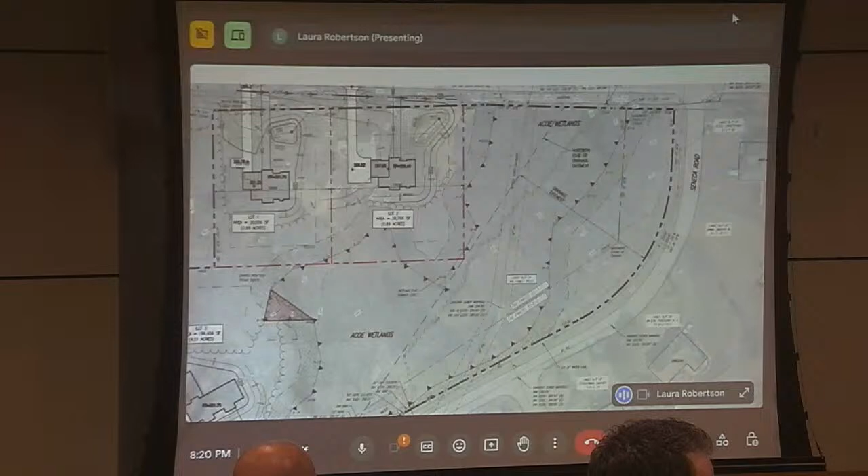I had a couple follow-up questions since we have Mr. DeSalt here. I had a couple questions just about your private stormwater practice, if you'll indulge. Sure. I was just looking at some of the detail, and I wanted to point out a couple things I noticed, and maybe I'm off, but it looks to me like there's a little bit of a difference, or maybe it's just a typo on the site plan.

Top of berm for the bioretention basin on lot 2 says 291.5, but the detail chart says 292.5. So I thought, since every foot counts on that lot, maybe check that. Okay.

I was curious to know if that under drain daylights to the southern end of the property, but I think that question was answered. Actually, I misspoke earlier—it does drain to the wetland, not to the roadside ditch on lot 2. But that does daylight to the wetland edge, and that's an under drain for the bioretention material below the surface of the ground. Right, and you're treating that, and it's designed to the 100-year, 10 and 100-year.

Correct, the under drain. So the system, the practice, is designed to pond 90% of the storms to 6 inches. And then anything above that 6-inch depth overflows and will flow into the wetland area. So it retains that 6 inches of depth for 90% of the storms, which is the water quality volume that will percolate through this filter media below the surface of the ground, and then that'll be discharged. That's the practice of cleaning impervious areas and contaminants.

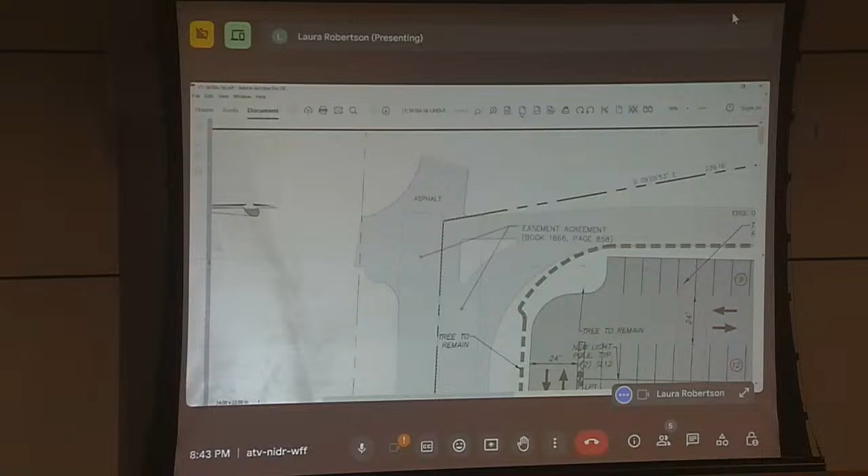So you're saying just build that corner out, I guess that would be the northeast corner of the site out, and which in result would end with alignment. Is that what I'm hearing? Yeah. And then I'm just zooming in.

Like what Luigi's saying, there's this existing concrete sidewalk that goes up along the side of Ace Hardware. And then the new plans show the crosswalk crossing here with a little bit of sidewalk coming down from the parking. I would still prefer a new sidewalk going down, but if it's a compromise, I think the back intersection could definitely use some work too.

Well, I agree with the applicant that having two sidewalks side by side that are very little used just seems like an additional impervious surface, which we constantly are trying to minimize. So if we could work on the intersection, I think that's a good compromise. And I'm personally okay with the crosswalk and utilizing what's there existing, but it's a vote.

Is there any reason why we can't use that sidewalk? No, I think it's open to the public. Yeah, we'll work out the easement there and see if we can adjust that intersection.

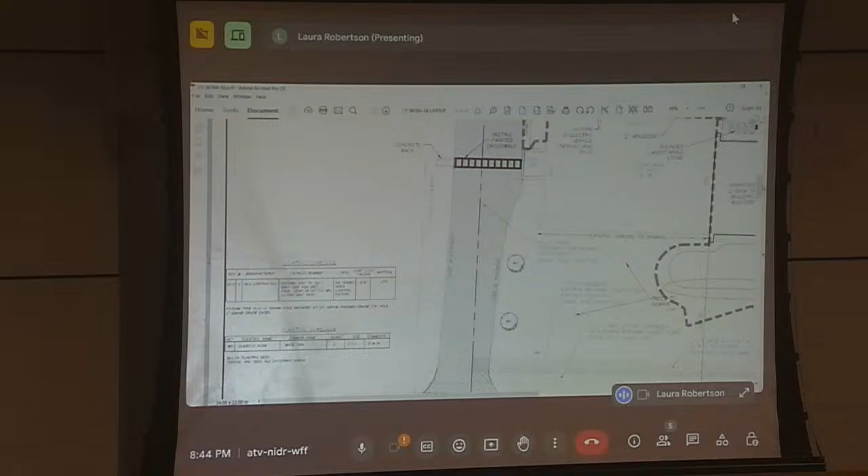So with your latest response, which they just received, that would go to the TDE to review, and then hopefully we'll hear back that the items are closed, and you have an action item to take a look at a couple of things you mentioned tonight, including this intersection.

So I thought we were pretty good with that. The biggest concern I heard at the last meeting was about the retention or detention in the front yard and what that's going to look like. It sounds like you increased it to plantings, so visually it looks hidden. Right, yeah, absolutely. And as you stated, it was a result of increasing the analysis to a 100-year storm—doing it underground and maintaining or expanding the underground storage you had would be quite costly.

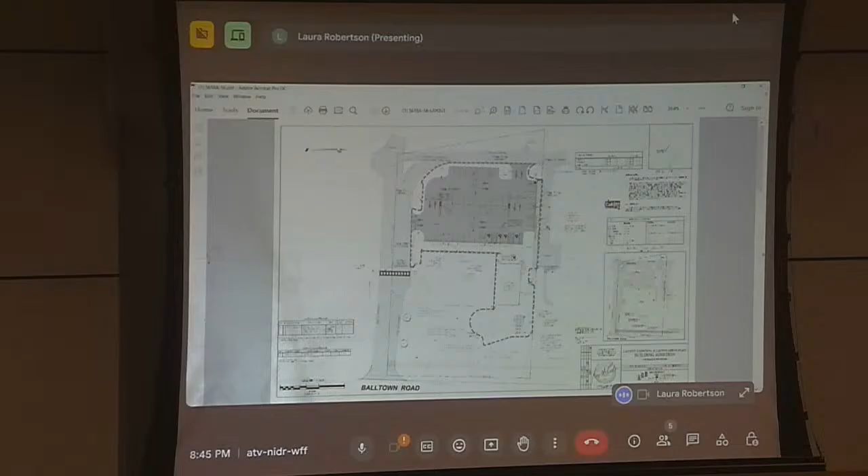Correct. And I do have one question on the loss of the two parking spaces. I know it meets code—is it going to meet the district's needs? Yes. Okay, because that's the big issue for me.

Absolutely. Well, I thought one of the other comments from the TDE was that he wanted to actually see the planting plan, not just a note that says landscape area with lilies, roses, fountain grasses, and landscaping boulders. Did you do a more formal planting plan? I have not, but I certainly can. Okay, I thought a note would suffice. Yeah, he wanted a formal planting plan to see the density and that stuff. That's easy enough, and that's what we typically do anyway.

Anything else you can think of, Ms. Gold, or Laura, or anybody? No, I think we're getting there—not quite there yet. All right, so is it too soon for tentative?

Because we just got this information today—we got two weeks, or do we? We would have to send this to the TDE, and he has to review a couple more things and come back to us. I think that would be rushing the TD—I think it would be tough. I don't mind preparing one, but I think the likelihood of it being ready is low.

And being that it's such minor technical items, and the time frame these guys have to get this completed for the school season—I don't know if there's a way to make it a condition, or at least get us to a point where I can have these resolved this week and get it to you by the end of the week. Again, they're minor, but if there's a way to set us up for approvals at the next meeting, that would be appreciated.

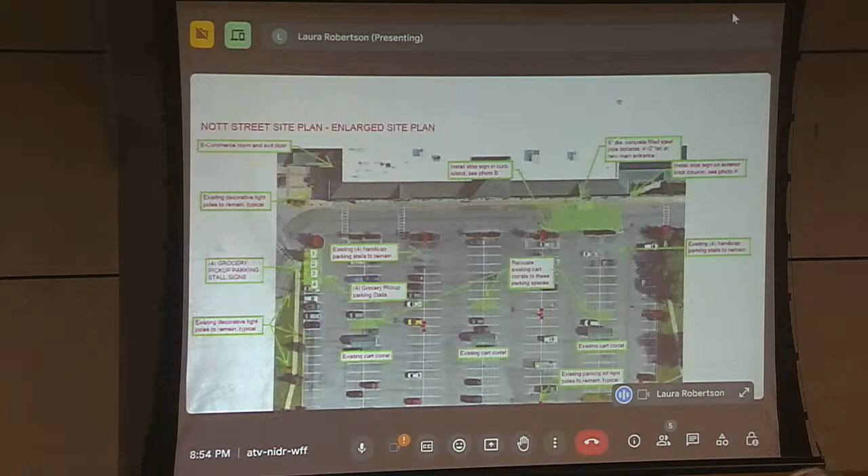On the site plan, there are currently 4 parking spaces on the left-hand side labeled 1, 2, 3, and 4. That's where ShopRite had their grocery pickup program stalls, and we're planning on using those same 4 locations. Our grocery pickup, or e-commerce room, is to the north of that, so our teammates can come out through the existing exterior door under the canopy and bring the groceries out to our customers in those 4 stalls.

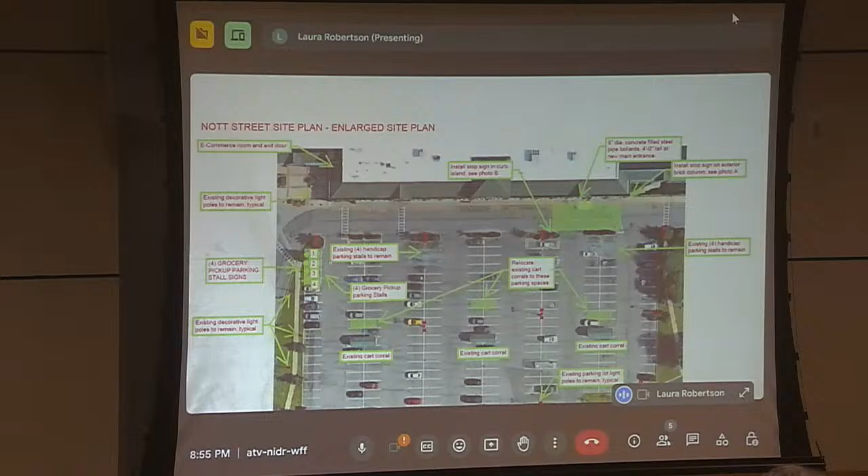There was a comment about site lighting. We do not plan on touching any of the existing site lights. In red, I've indicated where the tall parking lot poles with double head lights are located on the site, and we're going to leave those as is. Up by the grocery pickup there's one a little farther north, and there are some existing decorative light poles in that island that we'll leave in place. There's also one up in the walk area, and again we'll leave those as they are.

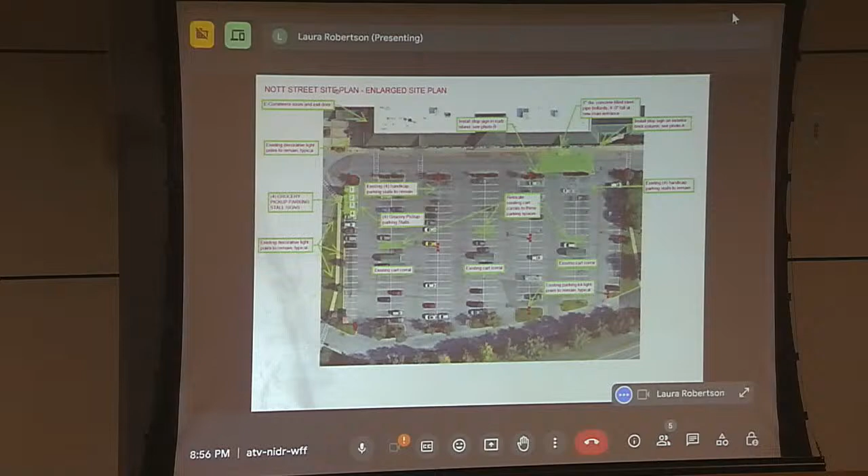Proposed crosswalks and striping. Clark provided us a drawing showing where he'd like us to paint the crosswalks, and we'll take care of that. We're in negotiation with our landlord, who will take care of it. In addition, the completed sidewalk apparently was never done as part of the original site plan approval, so we're in negotiations with our landlord to take care of that too.

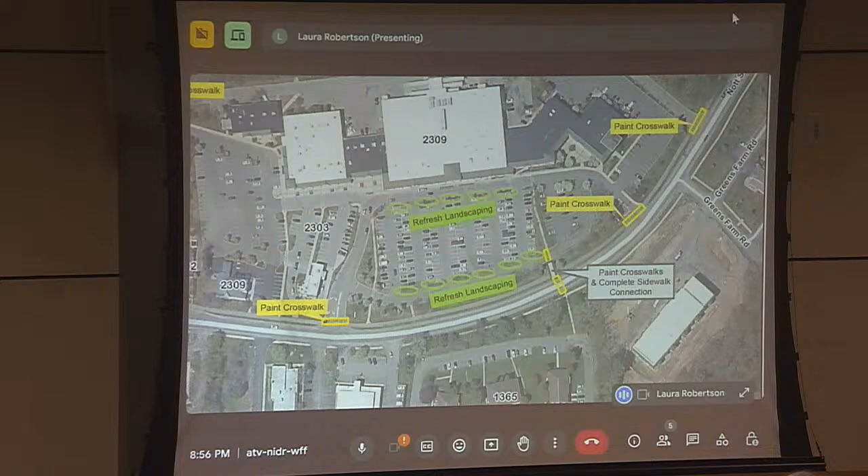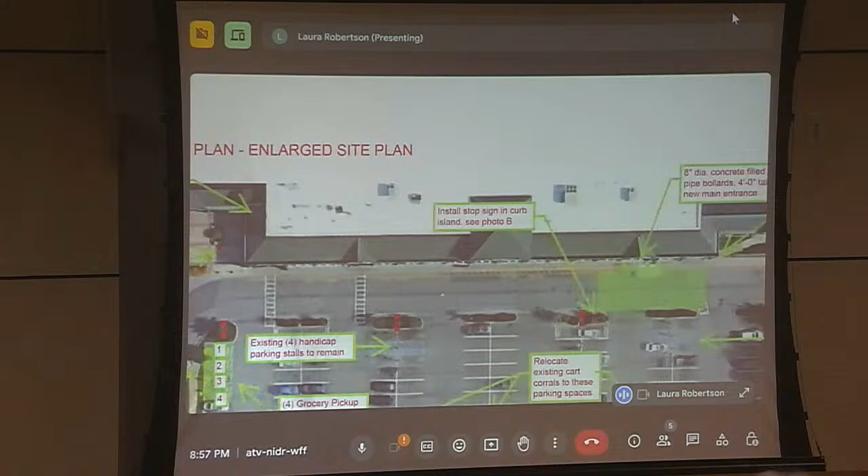In addition to the crosswalk, on page 3, there's a large green area in the front of the store. As part of our Market 32 remodel, we'd like to bring customers in through the front entrance directly into our fresh area where our produce program is. Currently, on the far right-hand side there's an entrance that's kind of hidden from customers' view, and there's another one farther over to the left in a small triangle, which is also hidden. So we'd like to close in the entrance on the right-hand side and provide a new entrance with an automatic door on the front of the building.

We would propose a striped area in front of the store with a stop sign on each side, so that any traffic crossing the front of the store will stop on each side of that newly striped area leading to the front entrance. Because the curb line is about 5 feet off the building facade, we'd like to place 4 concrete-filled bollards with a brown plastic cover, kind of a Market 32 brand. Concrete-filled painted steel bollards can rust, so we'd place 4 of those in front of the entrance to create a physical break, allowing customers to stop and be protected in that area.

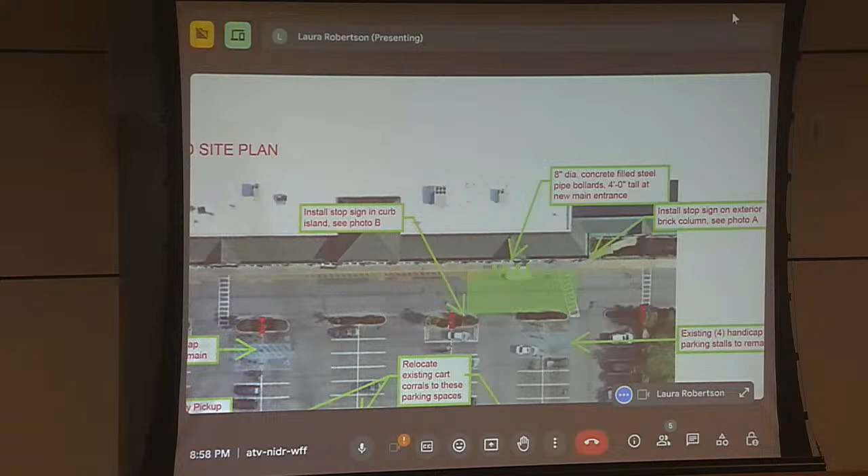The next page indicates where the new entranceway is, right underneath the small gable end on the right-hand side of the store. There was a request for dimension images for the stop sign, which I didn't provide, but I will follow up with that.

There's a freestanding stop sign in that island catching traffic coming from west to east. In some of our stores we also stencil the word 'stop' on the pavement on both sides, so there would be one right below that green text, just to the left of the stop sign. Similarly, on the other side there's a stop sign on that column, and we would entertain putting stenciled letters on the pavement that say stop.

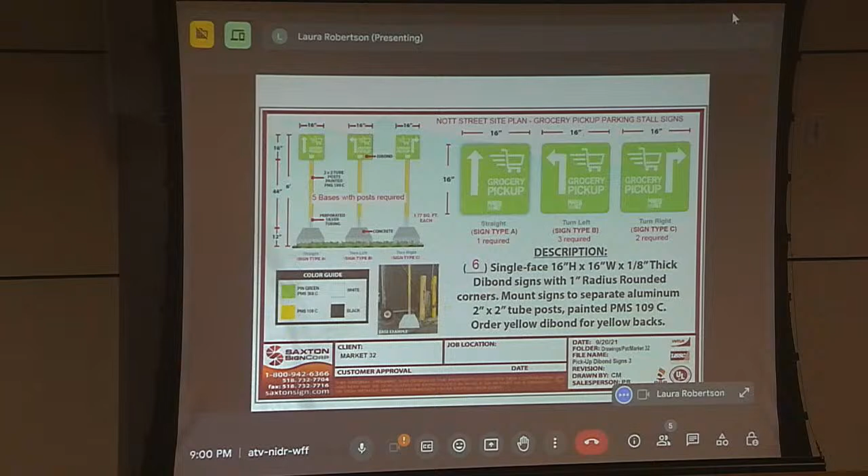And the proposed painted, extending the sidewalk and the landscaping in the front islands - it's in pretty bad shape. A lot of damage due to snow being piled up probably over all the years. We'll make sure before the reopening, which we're planning for the May, June timeframe, that all would be addressed.

I trust you know a lot of people are hoping for an earlier opening than that. We have 4 of them that we're going to be doing, so this is our first priority. They could always jump on the bus and go down Balltown. The one on the bottom end of Balltown isn't as convenient for a lot of people.

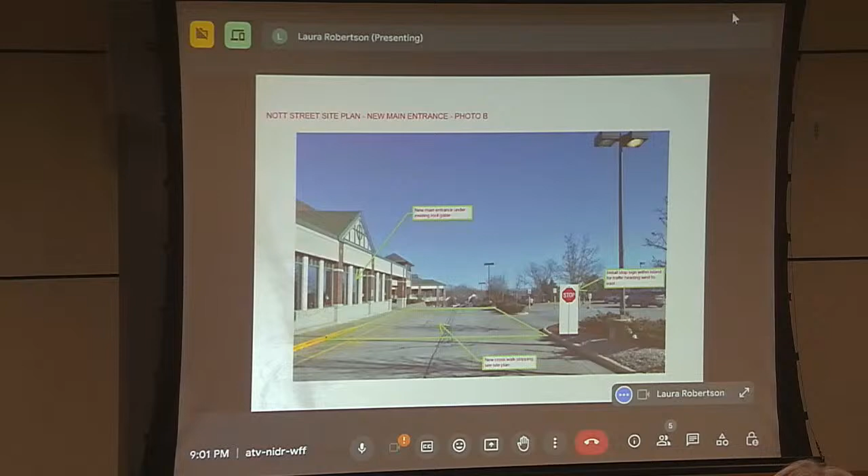I had a brief meeting with Clark last week where we started talking about exterior building signage, which will be a separate package that we'll submit to the town for review and approval - similar to what we did at our Niskayuna store, with a number of department signs on the facade. Yeah, there it is right there, we have it in our packet, and Clark did quite a bit of analysis on it.

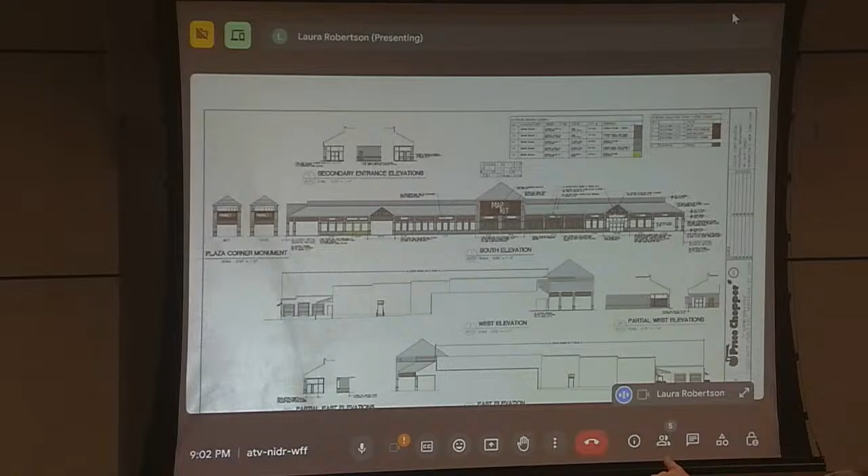I'm working on a total square footage of all the individual signs, as well as separating the Market 32 that's in the middle and the large gable end, in terms of what's the square footage of the '32' in green being a logo. And then the two elevations on the left-hand side where there's a new sign that says Market 32 Place, separating the green 32 on those because that's also considered a logo.

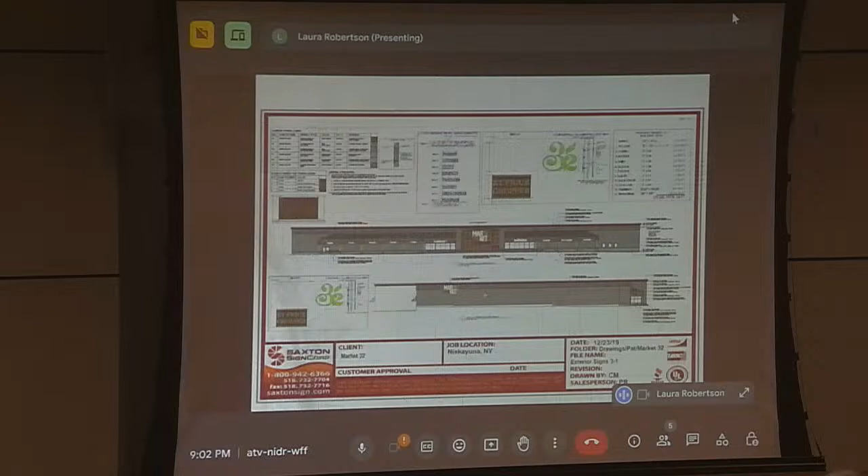Now, this corner pier - did I include a rendering of that? That's the Balltown Road one. Yeah, you gotta go back farther. Maybe I didn't include that - did I print that out for myself?

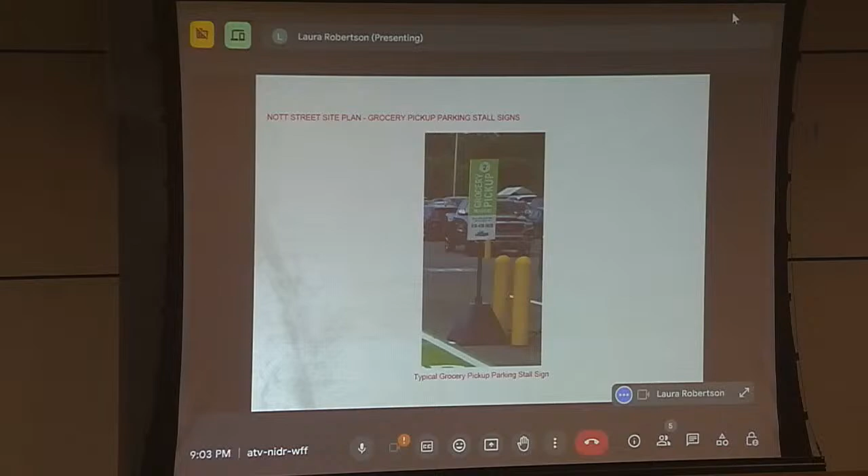Clark, jump in because you did all the work on this one, which you do for most of the projects, including comparisons with what ShopRite had and what you've got at Mohawk. Mr. Henry did listings of both what you're proposing for this site, what you have at Mohawk, and what ShopRite had at this site. It's all in his agenda statement, posted on our website by the way - you can go take a look at all the same paperwork that we get. It's available, he's done a lot of the figuring for you already.

If those are the finals, yes, it's true. Here's what I was looking for - here's that corner building monument that said ShopRite Square on it at one time, and those letters are gone. Those are the two that were on the left of the thing you're showing? I thought they were new, but no. There's nothing, except for the new signage near the market itself - you're just placing Market 32 where there was ShopRite signs, whether it be the monument signs out front or on the corner there.

Correct. And we have - I'm working on the details associated with, there's a pylon sign on 146. There are two smaller monument signs right off of Nott Street East at the main entrance, and then one farther down closer to here. So I'm working on the graphics for that, so you'll see that everything is picking up our Market 32 brand - there will be a lot of similarity in what all the signs look like.

Well, we've just - go ahead. Laura, could you pull up the picture that shows the driveway and the green area that was going to be right there? Go back to - yeah, that one.

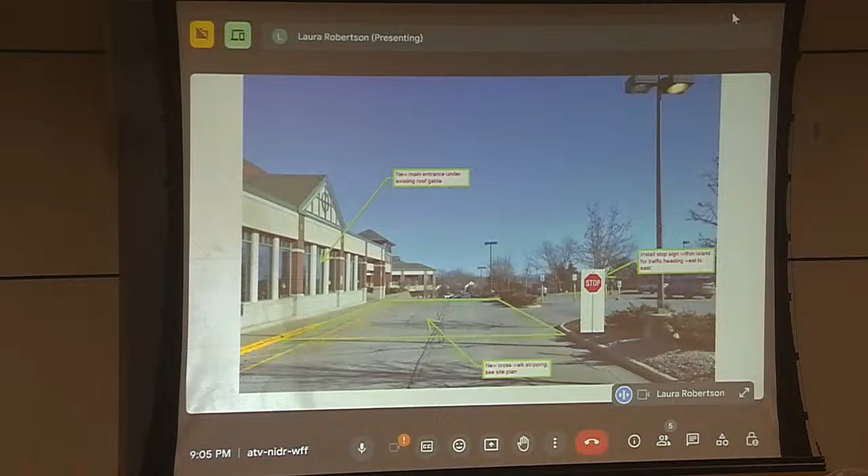So one of the things this plaza has always done is the sidewalk against the building is woefully inadequate. This completely divides any pedestrian access if you came in at one end of the plaza and wanted to go down to the east end. So what could happen, or used to happen, was you could enter at the end where the bottle redemption sign was, and go all the way through the gallery and come out the other end. If the entrance is moved and you don't maintain that east entrance, it will segregate a lot of the businesses if somebody wanted to walk from one end to the other. Does that make sense?

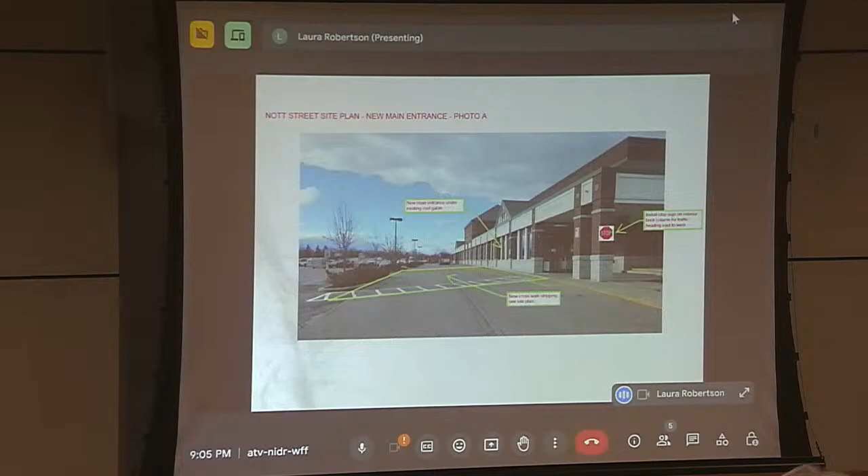We will be - so that long vestibule, that inside the building you're talking about. Right, so we are separating that long vestibule where ShopRite... yeah.

So we are closing that in because of the need for our floral department and our guest services. So you're right, we are physically separating that up so someone can't come in one side and walk all the way across to get to the other side.

So maybe it's worth exploring a deeper sidewalk in front of the store, because currently I think it's under 4 feet, or pretty close. You know, I measured that and didn't bring it with me. I thought it was closer to 5 feet. Okay, maybe it is, but it's pretty narrow.

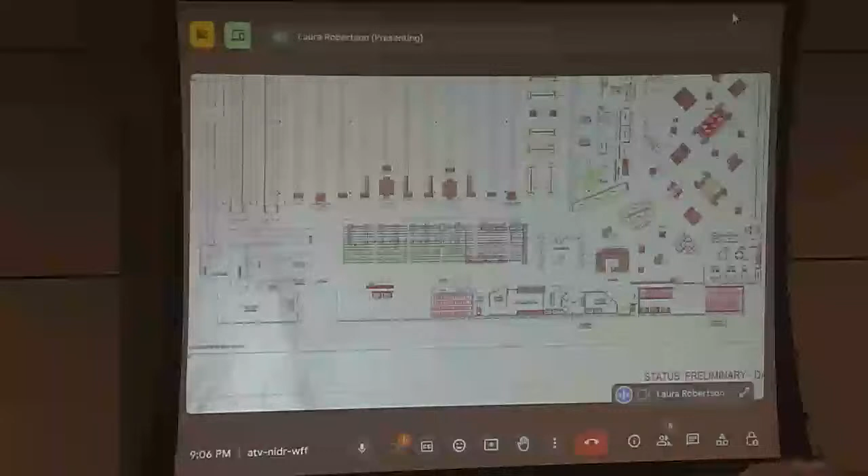And it's going to be in the middle of an area where if you're going to move the entrance and make a defined entry space with some bollards facing the parking lot, which I think is good, maybe this is an opportunity where the yellow striping is to pull the sidewalk out, making it just a little bit more inviting.

Quite a bit of customers come from buses, yes, it's part of the bus lane. So there's a lot of people that walk the plaza. They don't necessarily park, move, and park again like they do at Mohawk Commons, they move around their vehicle more than they walk down there. Here, a lot of people park and walk, so they would have the opportunity.

To extend that sidewalk, I think it may be beneficial, like the internal gallery is going to be absorbed with the footprint of the store. Correct, yes.

I have noticed a lot of people do walk down that sidewalk. I can say that from my experience doing some field work now that ShopRite's closed, people are using that sidewalk. I couldn't tell you how many of those people would walk into the store and then come out the other end.

So the only concern I would have is, would we be running into trouble with the width of the roadways heading east and west, and then the need for a fire lane in front of it by expanding that sidewalk? I don't think so.

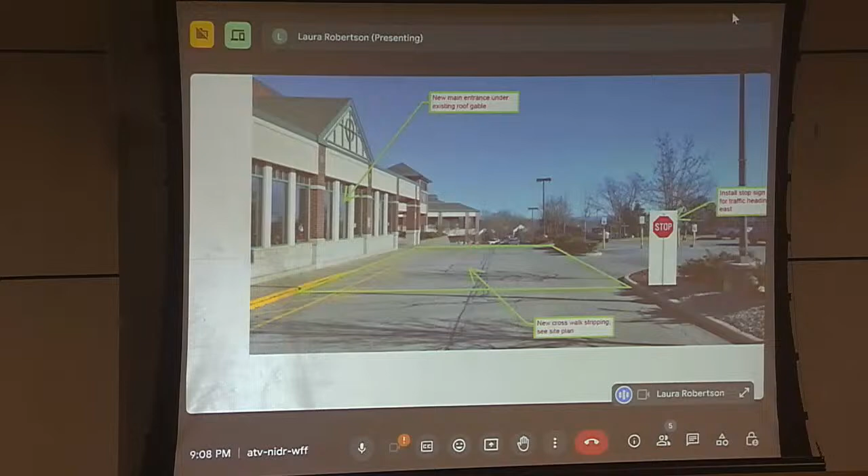I'm just a little confused on points of ingress and egress. You have a new main entrance that you're proposing with the bollards. Will the door on the west side be closed off in the future? No. So you'll still be able to walk through the store to get from one side to the other, but you'd have to go into the store, instead of staying in the hallway.

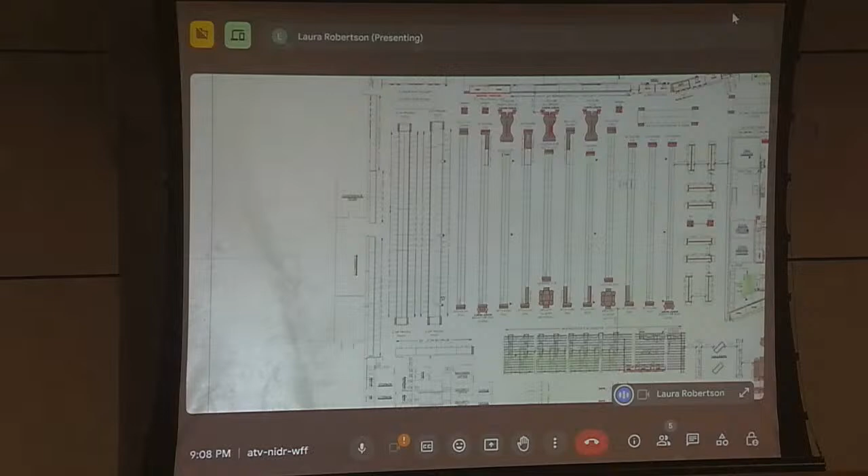Instead of staying basically at the store, because they had all sorts of product out there anyway in the carts. But it's just, you're not walking through, well, I guess less people shopping, I guess. Yeah, we always look at those.

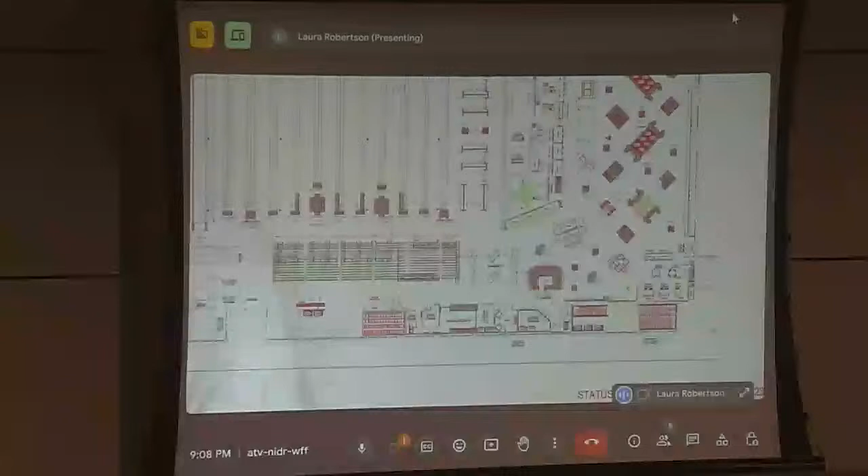You could still walk through, but you're going to come out where, so another option would be where you come out of the main entrance, just to make sure that sidewalk is either wide enough or expand it, or no product, because I believe ShopRite probably had product all along the edge. Probably in violation, I would assume too. But they had seasonal stuff and it would block that whole sidewalk. We wouldn't be doing that.

If so, this store is a little unique among our Price Chopper stores that we convert to a Market 32. A lot of times we have a large canopy overhang along the front of the store. Niskayuna is a perfect example, flowers, where we had whatever out there. So we put the flowers out there underneath the canopy. Here, we wouldn't have that luxury.

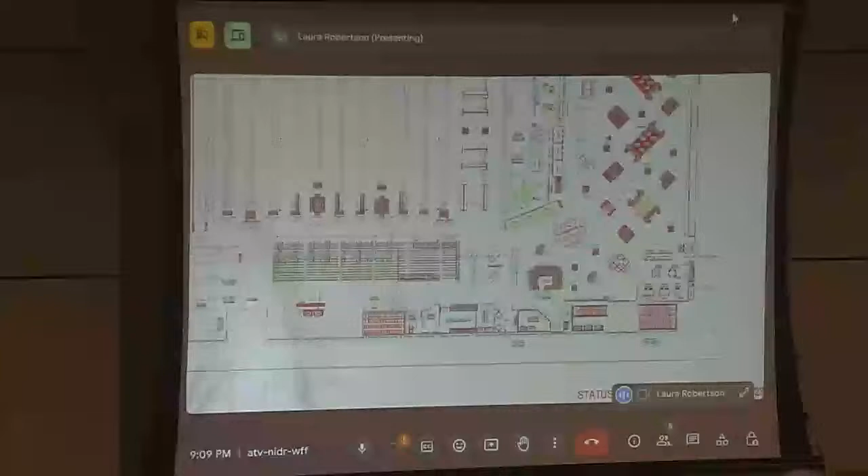Even over on the left-hand side of the store, where the canopy returns north and then west, picking up the area adjacent to the west, it's too far away from where we would put flowers and whatnot on that left-hand side. It would be too much manpower, it would cost us too much money.

But to David's point, even though you're walking in the store, as long as there's nothing out on the sidewalk that inhibits people, because then they end up walking in the road if they don't go inside.

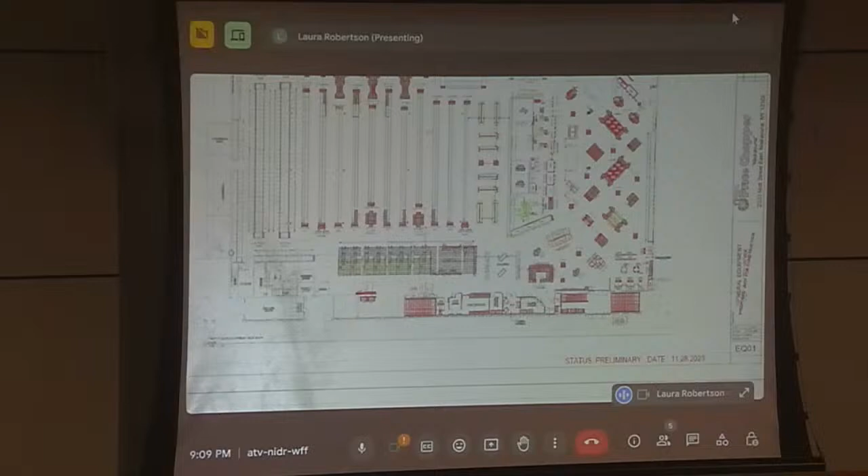One of the reasons why I put the stop sign on the masonry column of the canopy on the far right-hand side was, if I put a sign like the freestanding sign in the island, it's too much of an obstruction, people have to walk around that sign to get around it. So by placing it on the brick column, I don't have to worry about that becoming an obstruction for someone walking across in front of the store.

And it's far less apt to get damaged there. Say again? Far less apt to be damaged there. Yeah, true, yes.

So I certainly will give it some thought about what we might be able to do.

At that front entryway, we want to increase the depth for someone coming out that door, at least to get them over to the crosswalk there. Because the door's going away and there would kind of be a dead zone there.

I don't know if you have any plans for anything to go in there, bike racks or anything? We don't, we would want to leave it as an open sidewalk. But to David's point, even if you walk through the store and come out that door wanting to go the other way, we've got to keep the sidewalk clear, I guess is the bottom line. And if we get customers to walk into the store, maybe they'll purchase something as they go by, into the store, pack of gum, all the way around.

One thing I'd like to hear about, I'm not sure where you're at with this, we want to talk about signage. I guess we can save that to the end, but obviously everything's getting painted, your painting scheme for your corporate colors and everything. Could you just kind of summarize that for us?

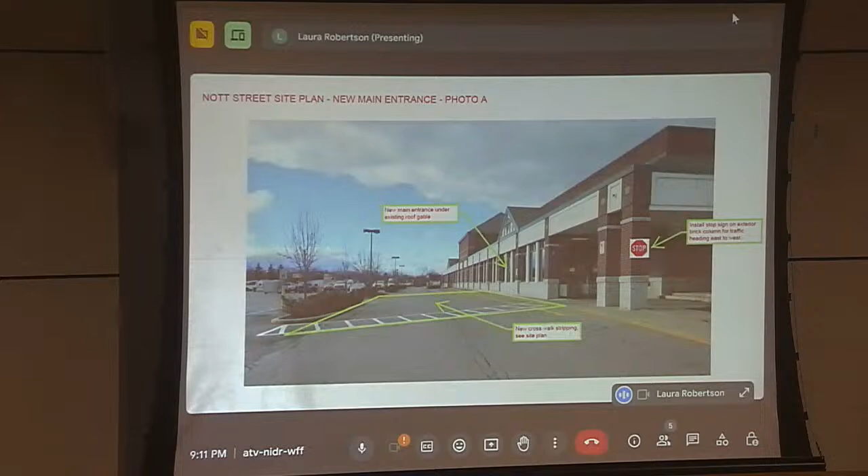So if you go back to the exterior elevation, maybe zoom in on the centerpiece that shows the Market 32.

So we have a traditional Market 32 brand color scheme where we introduce two tones of gray on our facades, a lighter gray at the base of the building, a darker gray above. In this case, it would be from the window sills up would be darker gray. In the middle where the Market 32 is, we're showing an EIFS material in this particular case, but we may change that. It'll be a scored EIFS multicolored panel, which is our standard brand for Market 32s. Now, we may change it from an EIFS to a metal panel, but we haven't finalized that part of it.

But that would be our brand identity for the store. The food fair letters, the florist letters, the welcome letters, those would all be just white Sintra letters, no illumination on them. The Market 32 sign in the middle would be an internally illuminated sign. To the left, the corner building that has the Market 32 place, those would be internally illuminated signs there also.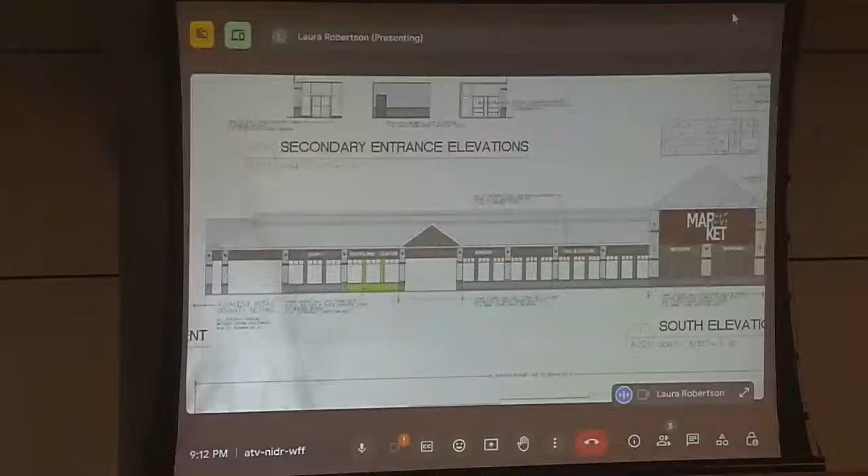Okay, how about the welcome? Will that be lighted? No, that won't be a lighted sign. Okay.

That just made me think of something. We would not introduce a welcome sign over in that secondary entrance because we really want that to be a secondary entrance. We want our customers to come into the front. So by not highlighting it - ShopRite had an entrance sign there, we wouldn't do that.

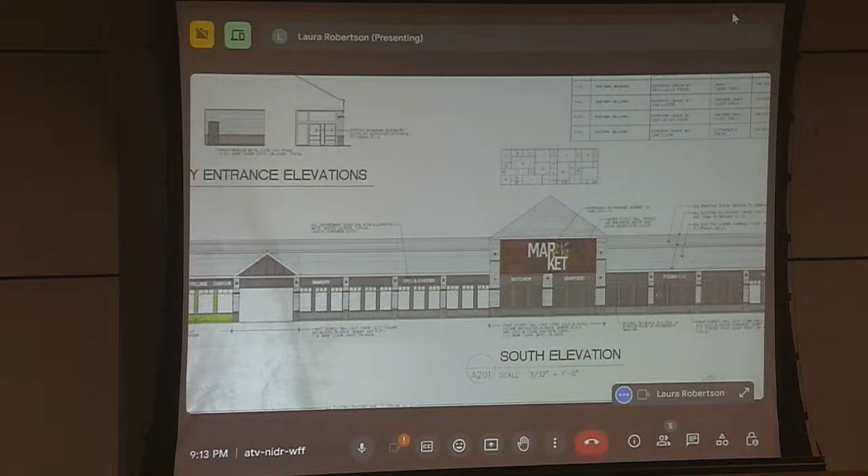What we are working with the landlord on, right now there's a green shingled roof on this. There's green finished aluminum storefront windows along this as well as the rest of the plaza, and there's other components on the exterior facade that are green. We're going to apply a black finish over the green. The green doesn't match our brand, and we'd like to change it to black, which is also another color that we use in our Market 32 brand. And we would only look to do that on our store.

So we're still working with the landlord to get their approval to do that. We would not replace the green shingles. If we had more money to invest in this store, we would replace it with a metal standing seam roof, but we don't have the kind of funds to go that far with this renovation.

So you're saying you'd basically paint the roof? We would put a metal standing seam roof up, and it would be pre-finished - no wait, are you going to do that? No, we're not going to do it. We're going to leave the green. And that was kind of where I was going with this - what's there now versus what the future holds.

So the roof is going to stay the same? Yes, as much as possible. But the window trim, well, we've asked the landlord, I haven't heard final resolution on how the landlord will deal with that.

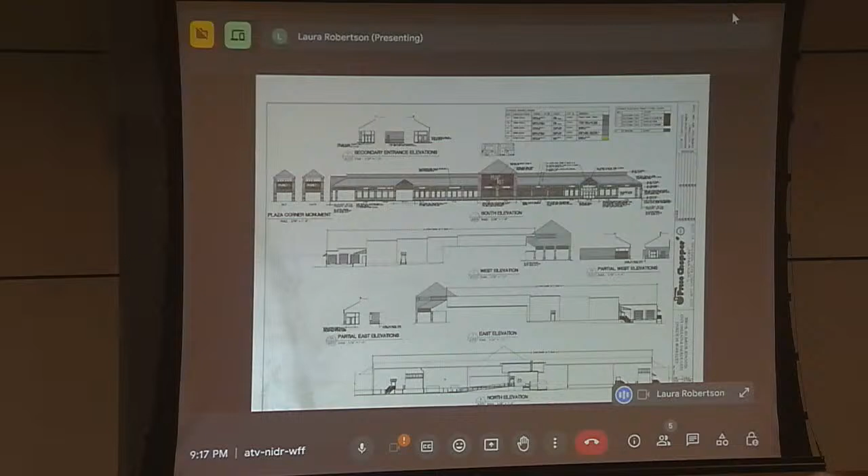We will maintain the existing automatic door that served as our grocery pickup and keep that in place - that's where our teammates will bring our grocery pickup program out. There are several windows in the front facade shown as dark gray; that's because we're building construction inside the vestibule area and don't want people to see the backside of the metal studs, so we'll frost that glass.

How about bottle redemption? It's currently outside - is that going to stay the same? Yeah, and actually that's the green area I forgot to mention on the left-hand side. The very first window is where the existing reverse vending machines were, and that's where we're going to put ours. In between the two vertical piers on each side, that's where the green is - that represents the recycling center, and we also have letters there to let our teammates know that's where the recycling will be held.

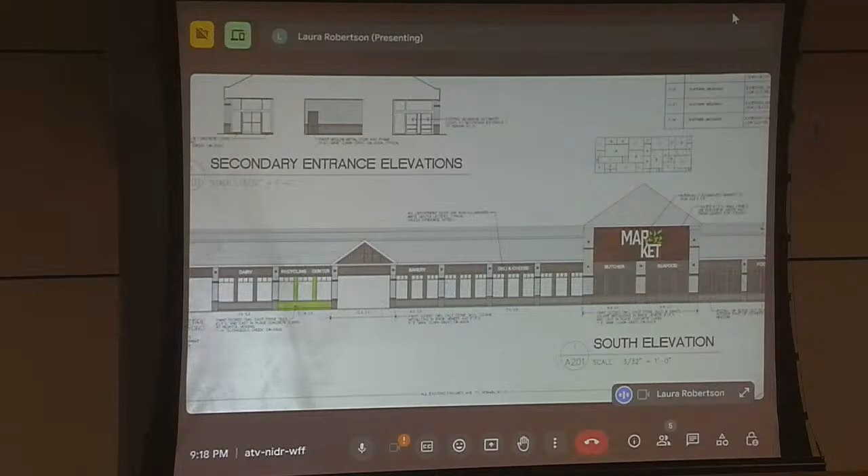Does the board have any question? One thing is signage - it sounds like it's a work in progress. I know Clark's been working on determining the square footage of signs and what waivers are required. Is that still a work in progress, or does he have everything he needs? For exterior signs, he does not - I still owe him a couple pieces on what's classified as a logo and what's not a logo. So that's what I'm working on. Clark is welcome to jump in, and we appreciate his help here.

Summarizing what I saw in the agenda statement - it sounds like ShopRite is a good unit to use, signs per amount of square footage per linear foot, and they normalized that. ShopRite was at 0.54 square foot of sign per linear foot, Mohawk Commons is at 0.75, and with the new proposals - tentative, still a work in progress - it was at 1.14 square foot per linear foot. So it kind of jumped out - is there a lot of signs here, or are the signs bigger based on the length of the building?

So if it's still a work in progress, I understand, but please give a hard look at whether they can be reduced in size to minimize the waiver. If you go back to that facade, what we've done in the past, reducing the number of department signs on the front facade, is not going to be a problem. You'll see all those little signs above almost each section of the storefront. Getting rid of some of those to get down to where we need to be is not going to be a problem.